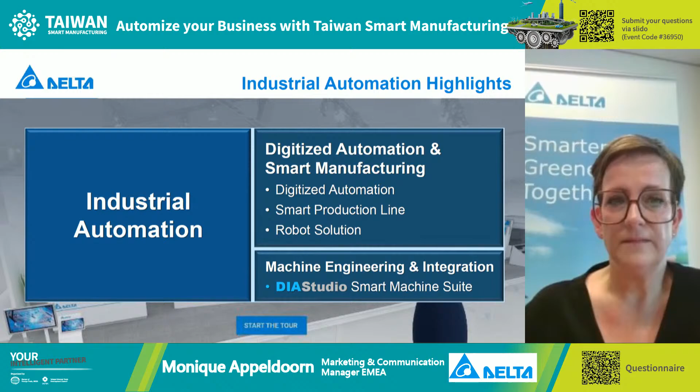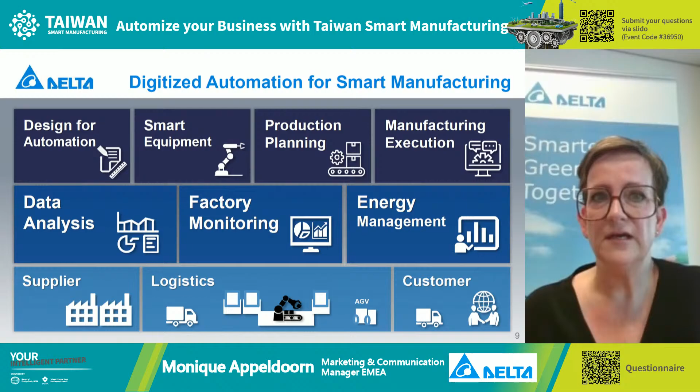In digitized automation, Delta is proud to offer a complete management software package that allows you to manage your factory floors and to be a smart manufacturer in the ever-changing world today. As you can see here, we have design for automation, smart equipment, production planning, and manufacturing execution. So basically, from the factory floor all the way up to the management of the factory, we can help you manage this.

In Digitized for Smart Manufacturing, we offer smart production lines, offering industrial Internet of Things, automation systems, industrial robots, and smart equipment.

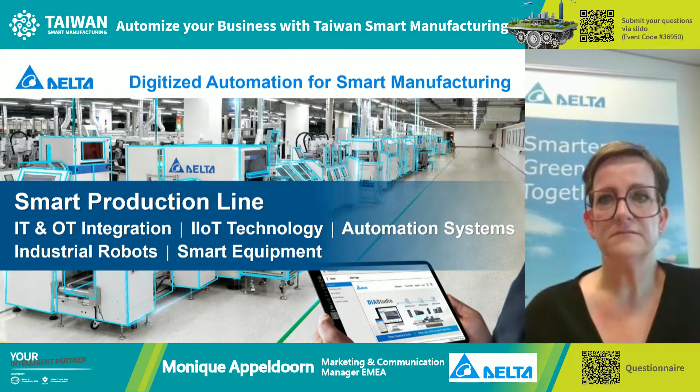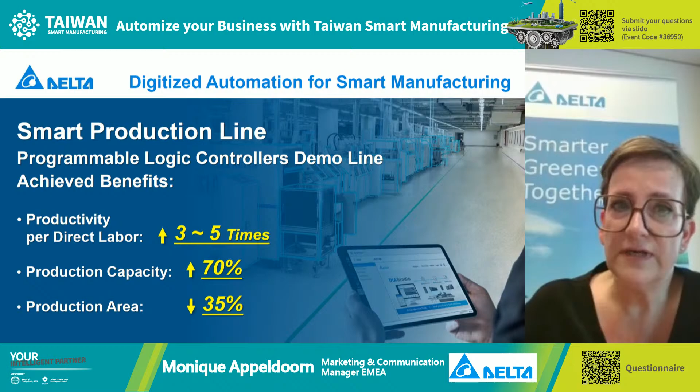In smart production line, we are looking at the smart production line in the Wujiang factory floor. This is one of our own factories in China, where we have implemented our software as well as our hardware to make a smart production line. By doing this, we've increased productivity per direct labor 3 to 5 times, increased production capacity up to 70%, and decreased the production area.

Of course, in smart manufacturing, you cannot think smart manufacturing without robotics today. What are the advantages of robotics? It's flexible production, quick implementation, consistent quality, and enhanced productivity.

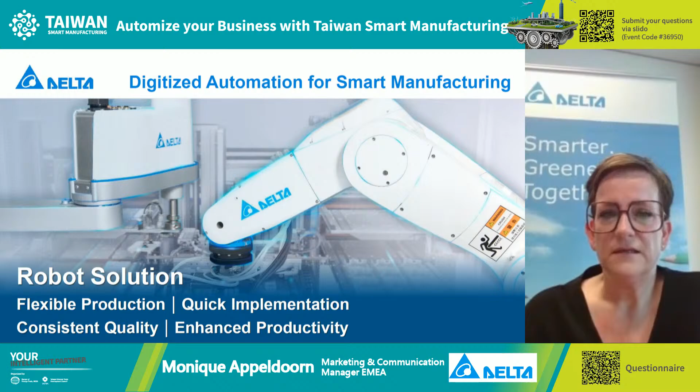And here we are at the Hannover Messe show. What we are focusing on today is the robotic coffee serving station. This is a coffee serving station that we've actually had made in Slovakia. You tell the robot what kind of coffee you would like. In fact, there's only one type of coffee - no cappuccino, no espresso. You tell the robot you would like a cup of coffee, and it will serve you this coffee as a visitor on our booth.

The last focus that we have at Hannover Messe this year will be the launch of the DIAStudio Smart Machine Suite. It consists of 3 packets of software: DIA Selector, DIA Designer, and DIA Screen. The big benefits of the Smart Machine Suite are reduced commissioning time and faster integration, and basically you can tell your hardware what you want it to do for your machine.

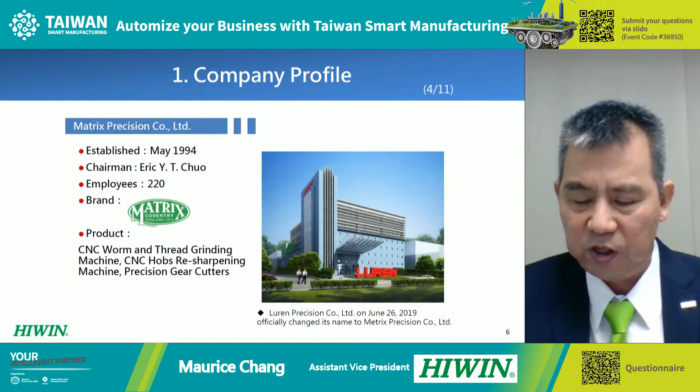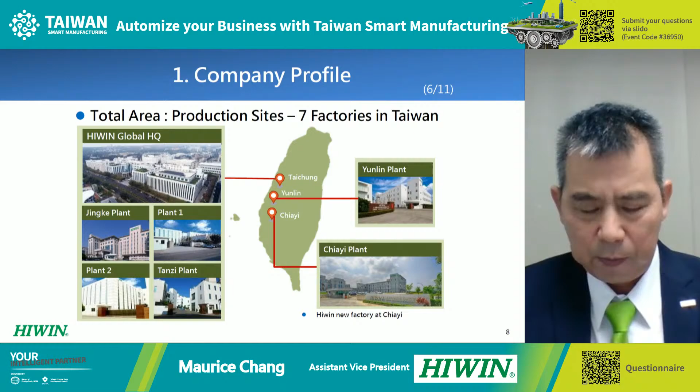All Hiwin's factories are located in Taiwan. We have 7 factories, with all key components being manufactured in Taiwan.

Hiwin also has a global network, having 12 subsidiaries and distribution channels in more than 50 countries globally.

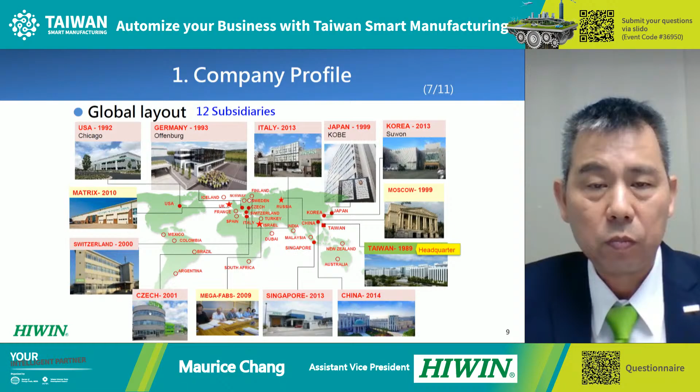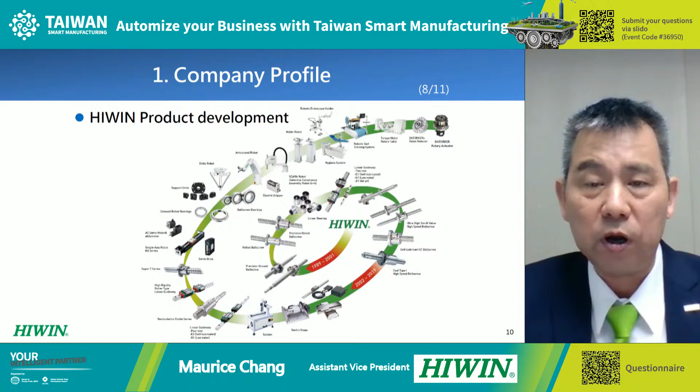Here you can see the full range of Hiwin's products, which includes ball screws, linear guideways, single-axis robots, bearings, cross-roller bearings, DATORKER reducer gears, torque motor rotary tables, multi-axis robots, end effectors, and medical robots.

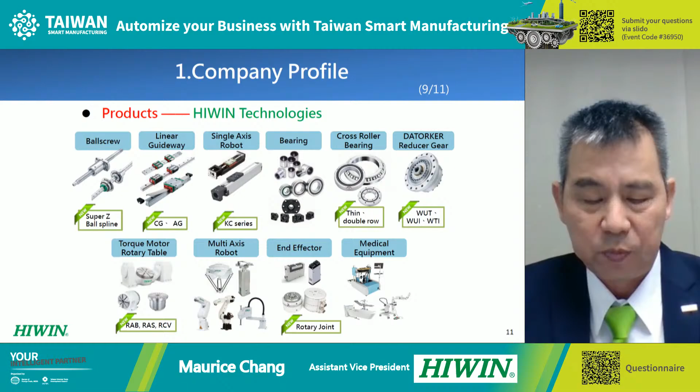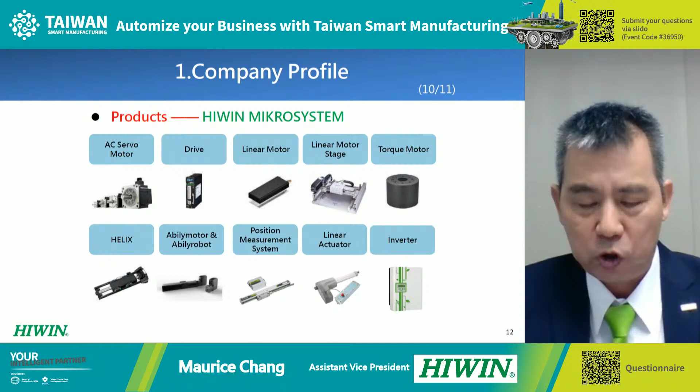Some of our best achievements include Hiwin currently being number 2 globally in both ball screw and linear guideway manufacturing. We are also one of only 2 manufacturers in Asia for torque motors, and the only company that combines motion control components with electrical components to complete a total solution for our customers. Hiwin is also the largest semiconductor coordinate robot supplier, and the top 3 semiconductor equipment manufacturers in the world are Hiwin's key customers.

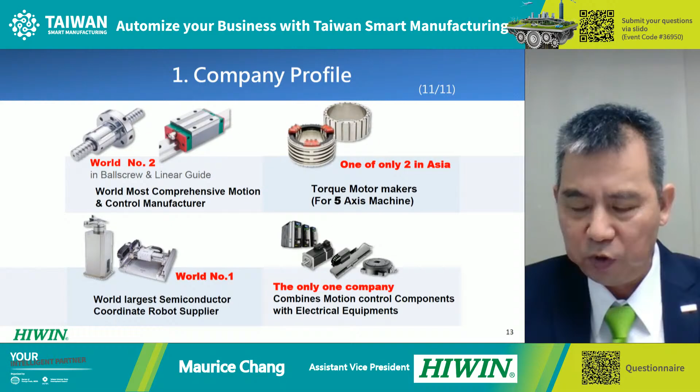Hiwin's outstanding performance has been recognized by the global media as we ranked number 16 in the Nikkei Business Asia300 Power Performance in 2019. Hiwin was also ranked in Forbes Asia's 200 Best Under Billion company listing last year.

Hiwin has a constant focus on smart manufacturing, and we have collaborated with universities in Taiwan and abroad to develop the next generation i4.0 ball screw. With a specially developed sensor and edge computing technology, the i4.0 ball screw can pre-diagnose the vibration, lubrication, temperature, and preload of the ball screw in precision machinery. It is also capable of sending feedback to operators and managers by computer or smartphone to prevent unexpected machine shutdown, thereby improving productivity and reliability.

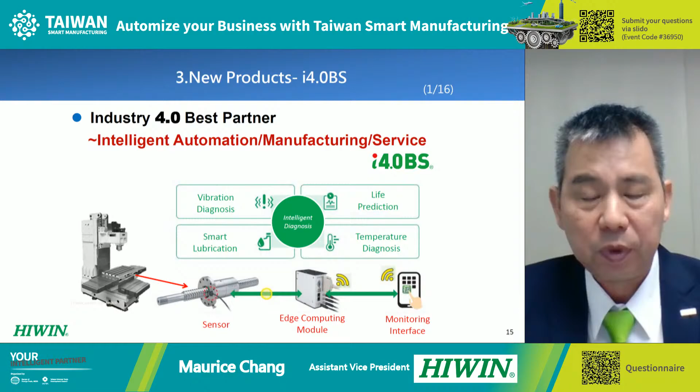Next, we will introduce some of Hiwin's total solution products, which are core strengths and value added to our customers. The KK total solution consists of our KK single-axis robot, coupling, servo motor, and drive. Customers receive total solutions for their automation. They just need to plug and play instead of looking for different suppliers for different parts and having the hassle of installing them themselves.

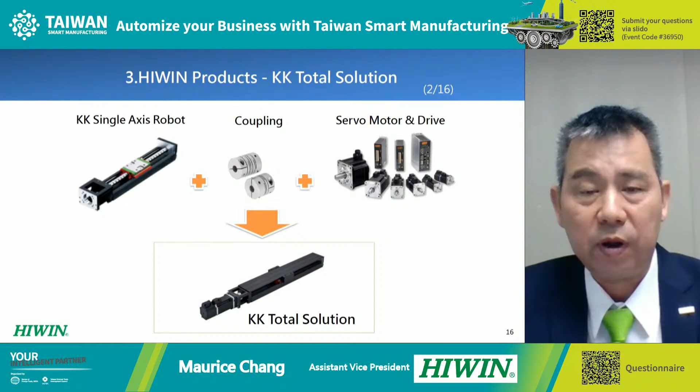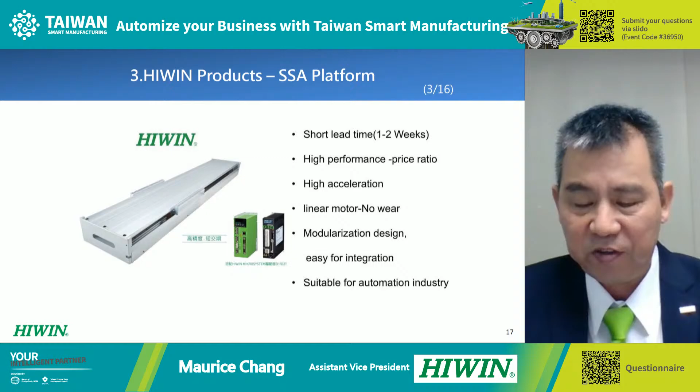This page shows the SSA platform, which is a total solution stage using our linear motor technology. It offers high speed and high accuracy. As you can see here, this is LED inspection using Hiwin's KK total solution.

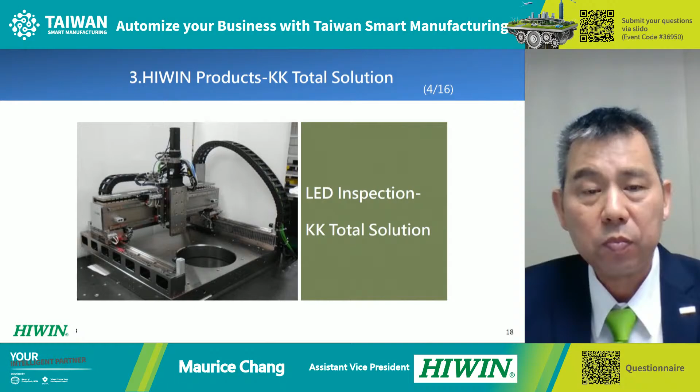This is the torque motor rotary table, which is one of Hiwin's main products. Being one of only 2 manufacturers of torque motors in Asia, we have the advantage of having in-house key components technology and know-how. Therefore, we have the competence to offer top quality, value-added products to high-end customers. Hiwin designs and manufactures all the key components such as torque motors, cross-roller bearings, rotary table bearings, and drives for our torque motor rotary tables.

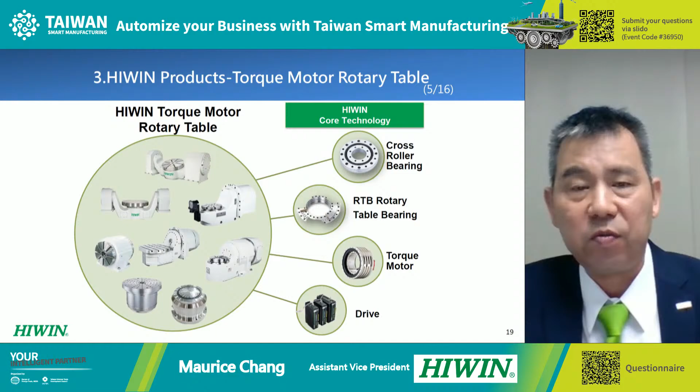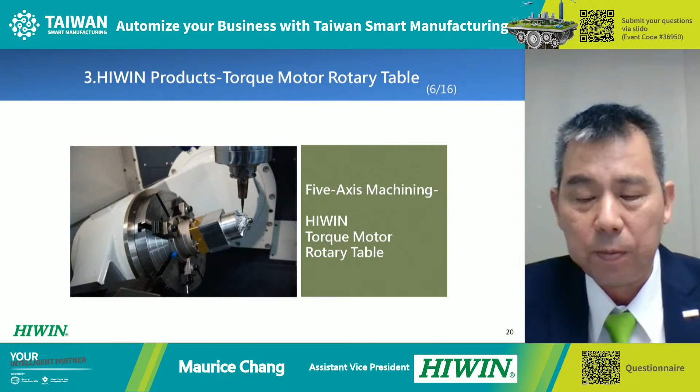This is an example of a precision 5-axis machine using Hiwin's torque motor rotary table to produce turbines for automotive parts. The torque motor rotary table also helps customers increase the machine's value-added function to upgrade from a 3-axis machine to 4 or 5-axis machines. This enables the production of more complicated and more precise components by a single machine.

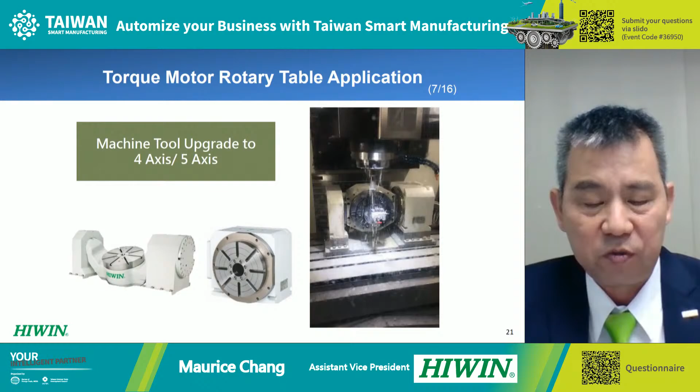Moving on to our robots, Hiwin has a wide range of robots, from the articulated robot to SCARA robot for industry applications, to the delta robot mainly used in the food and pharmaceutical industries, to wafer robots which are used in semiconductor industries. All the major components of robots are manufactured solely by Hiwin.

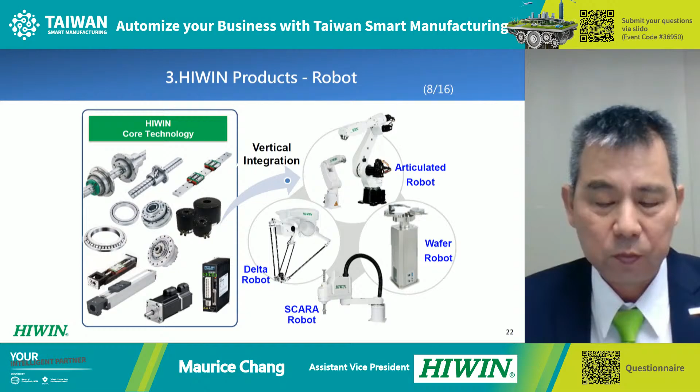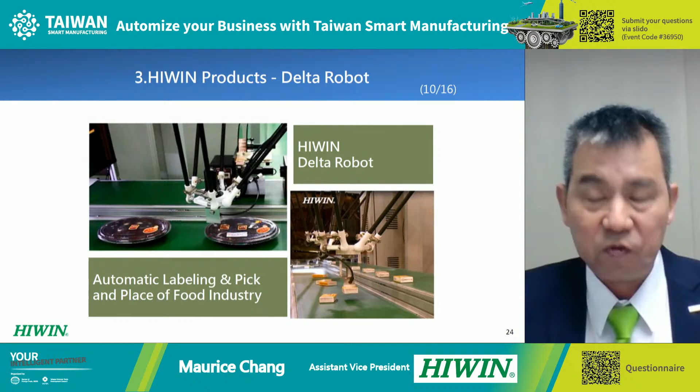The latest total solution product from Hiwin is the DRA Datorker rotary actuator. The Datorker is a high precision and compact gear reducer with a strong gear reduction ratio used in robots, high precision machinery, and indexing applications. Along with the servo motor and our D2T drive, we can offer customers an integrated precision product, which customers, again, just need to plug and play.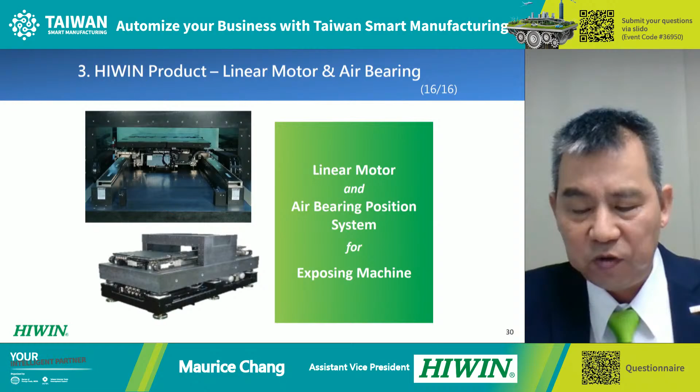This concludes Hiwin's presentation today, and we'd like to thank everyone who is attending this online press conference. If anyone has any questions, please feel free to ask later on.

Thank you. Thank you very much, Maurice. And as you have heard from Delta and also from Hiwin, they have many product lines. Today we know that we have to keep everything under 10 minutes, so everything sounds a little bit rushed. For this reason, we have a questionnaire at the bottom of the screen.

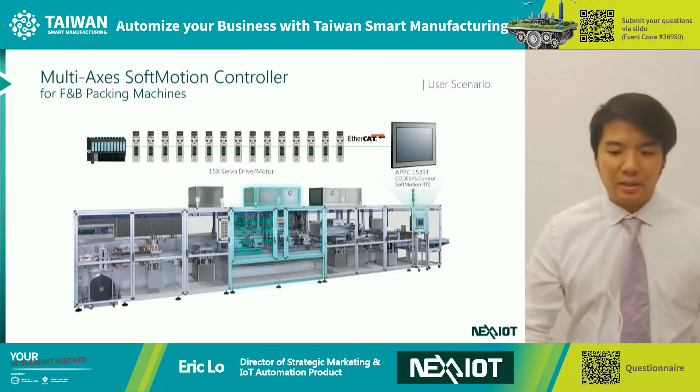The system architecture is quite simple. As you can see in this slide, you can have one panel PC installed with software called Codesys Soft Motion. This makes the panel PC a soft motion controller with HMI functionality to replace the traditional PLC and HMI. And with EtherCAT technology, you can easily use a LAN cable to connect 15 axis of servo drive and motor, and remote I/O with sensors included, so the system architecture becomes even more simplified.

So our offering of the soft motion controller includes one controller, panel PC or box IPC, installed with Codesys soft motion software inside as a soft motion controller. We also offer distributed I/O, so it's a very comprehensive soft motion function for the customer. It supports up to 255 motion axis, and of course distributed clock enabled for real-time control. The most important thing is that the soft motion controller follows the PLC open standards, the motion control part 1, part 2, and part 4.

The next feature is that it's a high performance controller. The fast cycle time is within 50 microseconds. The maximum task you can run is 100 tasks per cycle. It also supports Profinet, Ethernet IP, EtherCAT, and Modbus TCP protocols, so you can easily connect to Siemens servo drive and motor, Rockwell Automation's servo drive and motor, and even Beckhoff and Schneider's automation products. Also the OPC UA server is available to connect to the SCADA system so the machine can be easily monitored in the remote center.

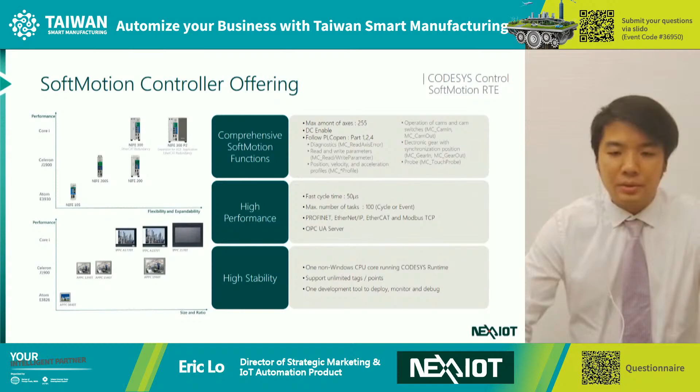I will go through two successful stories. The first is metal sheet manufacturing. In the past, they used two PLCs and one small 7-inch HMI solution to construct their metal sheet machine. After we offered the 15-inch panel PC installed with Codesys and EtherCAT included, they achieved production speed up to 70 meters per minute, which means they enhanced production speed by 40%. They also simplified the system architecture from 2 PLCs and HMI to an all-in-one panel PC controller.

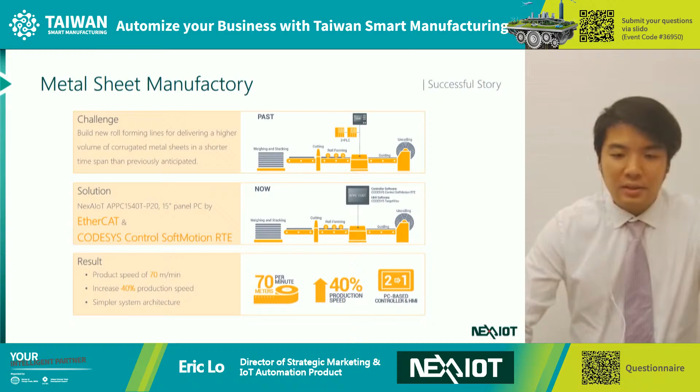The other successful story, as mentioned earlier, is a packing machine. In the past, the customer used CANopen to do the 15-axis soft motion control inside the food and beverage packing machine. But the control algorithm required programming 15 times, because each servo drive and motor needed its own programming. The synchronization was also quite complicated.

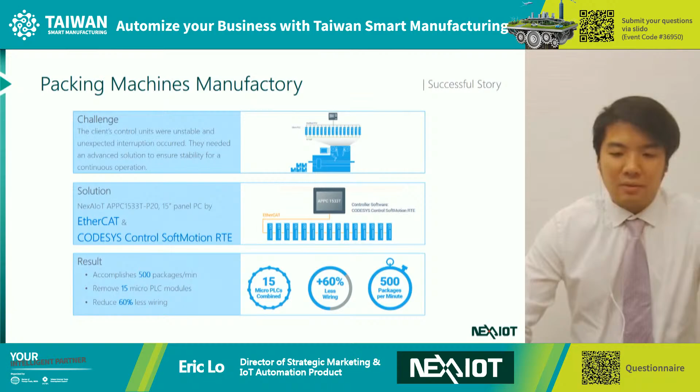But we offer PC-based automation solutions with a panel PC installed with CODESYS and EtherCAT. Now they just do one programming and simplify the system architecture with one LAN cable. As a result, they complete 500 packages per minute and remove the 15 micro PLC modules and their programming. For the customer, this reduces 60% of wiring. So the total cost of ownership of the machine is cut down significantly, and productivity is increased for the customers.

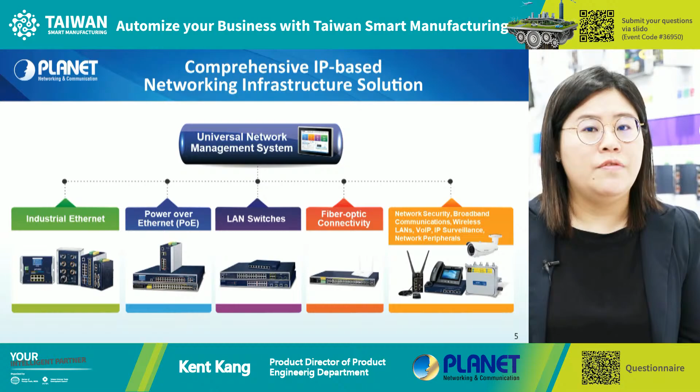As you can see, all the network infrastructure devices are deployed everywhere in various markets, such as industrial applications like smart factory and IoV, as well as smart cities, telecoms, enterprises, and data centers.

Hi, I'm Kent, the Product Director of Planet Technology. Now I'm going to show you how Planet's innovative solutions can help automize your industrial network. To start, Planet Industrial Ethernet Solutions consists of a complete product portfolio at the information, control, and device levels. It's highly reliable and secured. Products we design are compatible with many industrial protocols, such as Modbus TCP, EtherCAT, and MQTT, to ensure interoperability among all industrial devices, such as HMI and SCADA systems.

Our devices help build connections via multiple media. High performance and security functions are also ensured, such as up to 10 gigabit connectivity, cybersecurity, flat-type design, and long-reach transmission, and more. Planet provides multiple form factors to fit different environments and installation preferences. It's compact in size, fitting nicely in any environment, and the high-density features are perfect for various networks. The flat-type design can be installed in an in-wall cabinet. The outdoor weatherproof and vibration-proof products are suitable for rail applications, with wide operating temperature from -40 to 75 degrees Celsius, providing customers with stable data and power transmission.

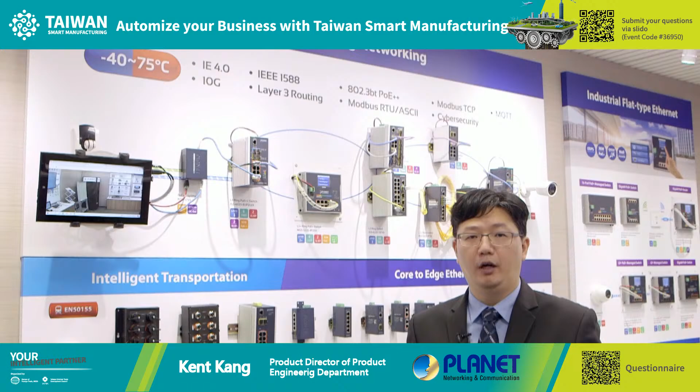Next, you must have heard of Planet's famous Power over Ethernet solutions. With one UTP cable, our product can deliver up to 95 watt 802.3bt PoE++ for data and power transmission.

This power can be delivered to devices like IPC, POS systems, healthcare, digital signage, and smart lighting. Except for standard UTP cable, we allow customers to reuse their existing phone wire and coaxial cable to transmit data

and power, and further extend the distance, saving customers time and money. We provide a wide range of PoE products to suit different demands for all industrial environments.

Also, with our unique intelligent PoE management functions, devices can be monitored, analyzed, and managed.

Speaking of device management efficiency, Planet has specially developed the Universal Network Management System. All your wired and wireless networking devices can be centrally managed.

As you can see here, with our unique Touch LCD designed Universal Network Management Controllers, network devices can automatically be discovered with the topology shown on the screen.

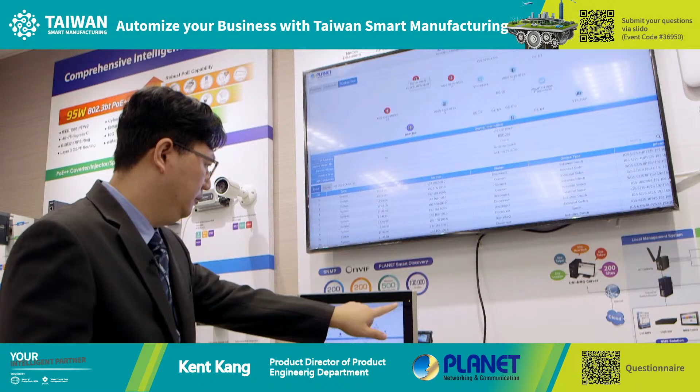It also features an easy-to-use dashboard, event report, and alarm to ensure the efficiency of your industrial network.

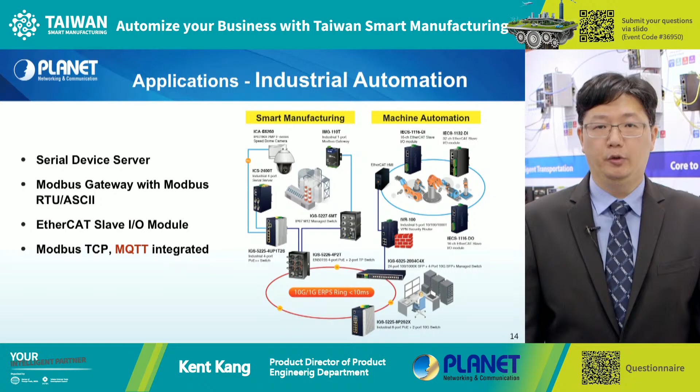Apart from Ethernet data transmission and deployment, we also help customers connect their existing equipment to Ethernet networking. Here is a Planet industrial automation application, which includes smart manufacturing and machine automation.

Our industrial automation product line includes serial over Ethernet, Modbus TCP switch, and Modbus gateway, EtherCAT I/O modules, and serial over 4G LTE gateway, all designed to help realize IIoT-based connectivity.

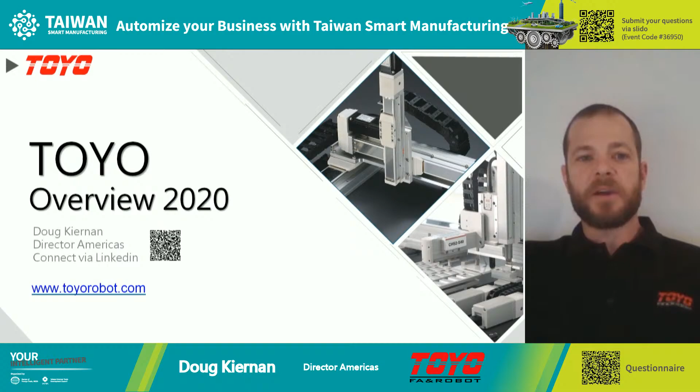Toyo is the largest single-axis aluminum extrusion electric actuator manufacturer in Taiwan and mainland China. I know that's a mouthful with a lot of adjectives, but think actuators with electric motors, not

pneumatics, and also not steel body actuators that most linear bearing manufacturers make. Toyo was founded in the year 2000 in Taiwan.

Our factory is down south in Tainan, and our sales and technology center is up north in Hsinchu near Taipei. It's less than a 2-hour ride between them on the high-speed rail.

In June 2019, we opened our newest factory, which is about 20,000 square meters. That is our main manufacturing and assembly area. We also have a 6,600 square meter CNC shop next door.

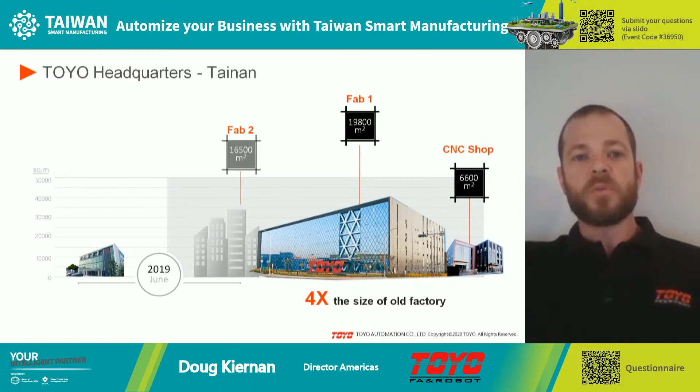This new factory is 4 times the size of our previous factory. We also have land and plans to expand as needed.

This year, we are focusing on growing the Americas. I am very proud to be the first American employee joining Toyo late last year.

However, I've been working with Toyo for almost 6 years, first as a manufacturer's rep and then as a sales manager for Toyo's first American distributor. I'm really excited to grow the business in the Americas, and Europe is not going to be far behind.

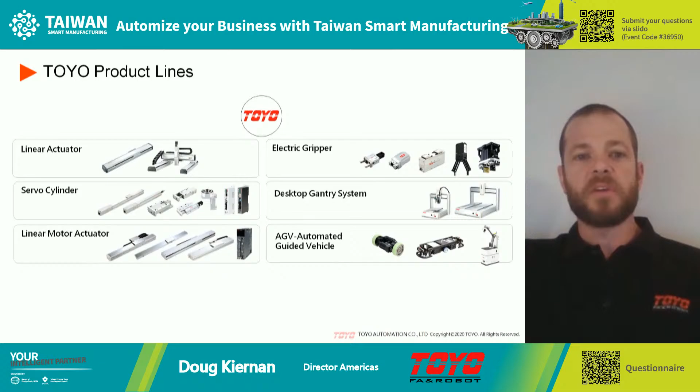Here are the 6 Toyo product lines. Linear actuators, which are ball screw or belt-driven actuators without the motor supply. Servo cylinders, which are actuators with a single-axis controller and the motor. Linear motor actuators, with both iron core and coreless models. Electric grippers, which fall under the servo cylinder, utilizing the same single-axis controller. Desktop robots, turnkey XYZ with our multi-axis controller and software. Automated guided vehicles - we are the largest AGV manufacturer in Taiwan, with over 800 AGVs deployed in the field.

Here is our GT actuator series. This is a very important product line for Toyo because it's the first product that uses our integrated linear bearing technology. Look at the image in the lower left corner - we take an aluminum extrusion that is machined and precision milled, then we bond the steel bearing raceways into the extrusion, and then we do a single pass grind on this body assembly.

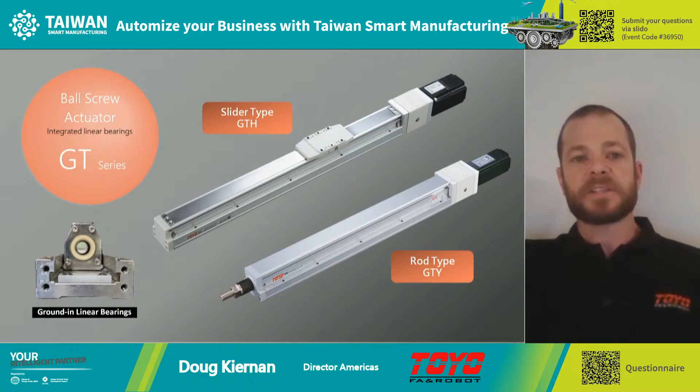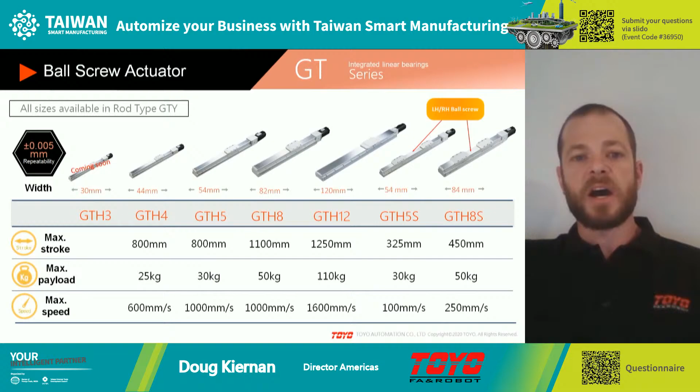Here are the 5 different GT frame sizes that we currently have: GT3 at 30 millimeters wide, up to the GT12 at 120 millimeters wide. We also have left-hand, right-hand ball screw configurations for the GTH5 and GTH8, which can be used for alignment or a large gripper application. All sizes also have the GTY rod style actuator.

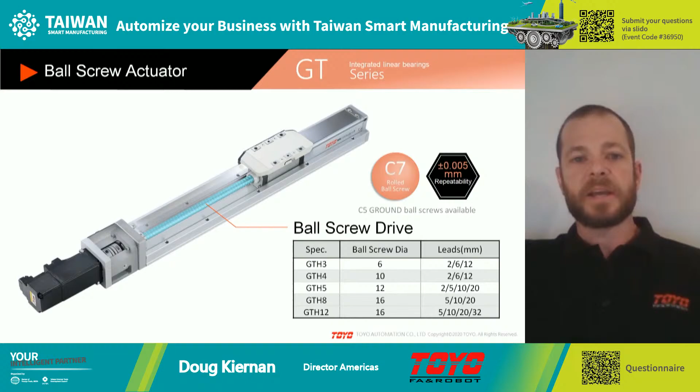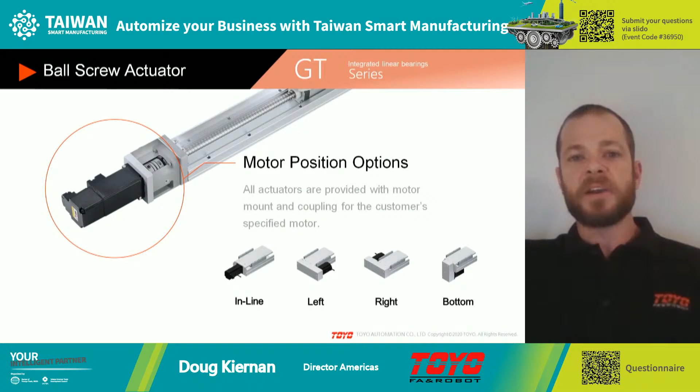All of our actuators are supplied with a motor mounting block and a coupling for our customer's selected motor. We also offer side or parallel mount motor configurations.

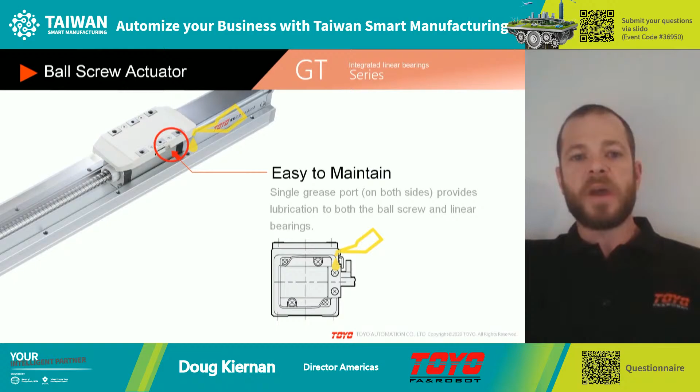This is a really nice feature providing a single grease port that will lubricate both the ball screw and the linear bearings. With our magnetically sealed actuators, we can add a pneumatic port, and if you pull a little bit of vacuum, it becomes Class 10 clean room rated. Conversely, if you put a little bit of positive pressure in that pneumatic port, it's going to do a really good job helping to keep dirt and debris out of the actuator.

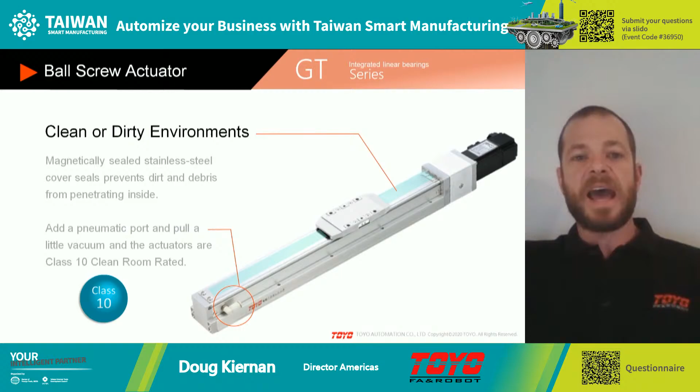The GT series has a lot of nice mounting features, starting with the option to mount from the top using through holes or from the bottom using tapped holes, both without having to remove any covers. All actuators also come standard with 3-pin locating holes and a reference edge.

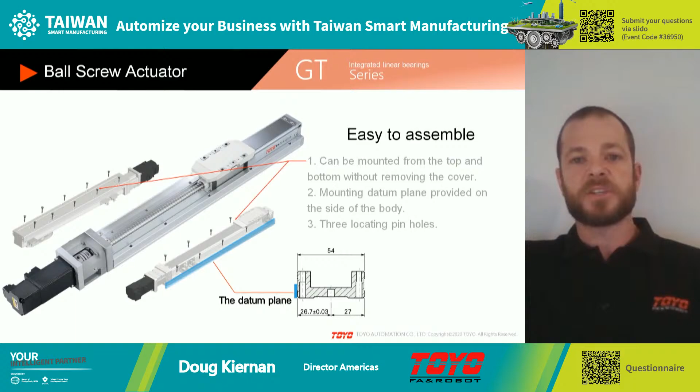Our single pass grinding manufacturing process provides precision straightness and flatness of plus or minus 20 microns per meter. This is on par or better than steel body actuators of some of our competitors.

This is a comparison showing our old ETH6 actuator that used a mini size 15 wide bearing compared to the GTH5 actuator. We achieved similar bearing capacity and used the same ball screw in a much smaller package. Toyo is now using this technology across other product platforms, including grippers, linear motor actuators, and mini slide stages, all of them reducing size, weight, and cost.

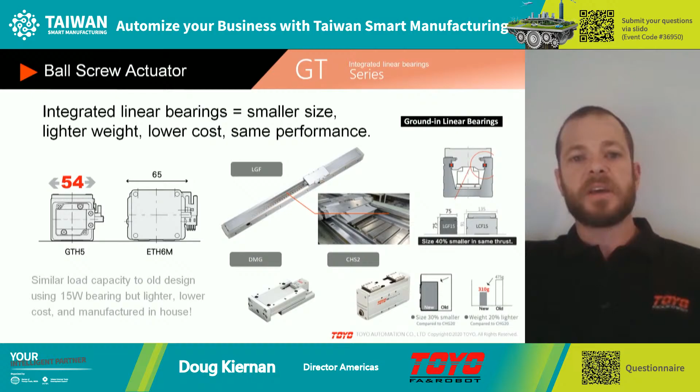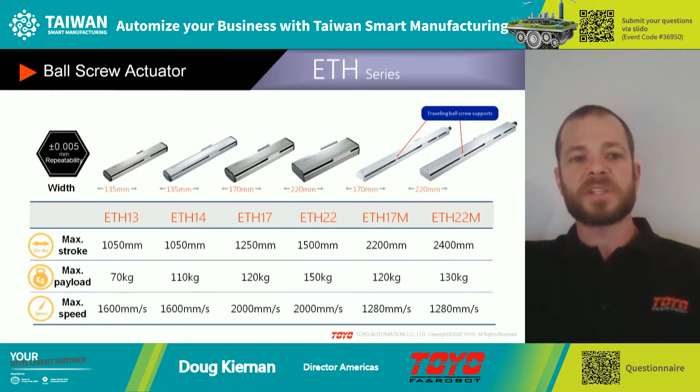Once we grow out of the GT series, we get into our ETH series, which is a common actuator configuration using 2 linear bearing rails with a ball screw down the middle. You can see our product range here, starting with size 15 bearings up to size 25 with similar size ball screws. For extra long strokes, we have traveling ball screw supports in the size 17 and 22.

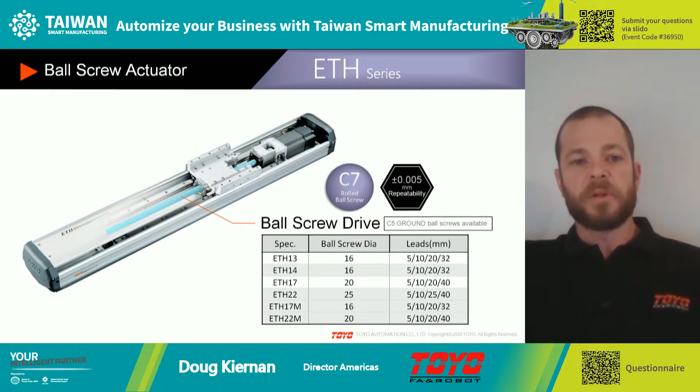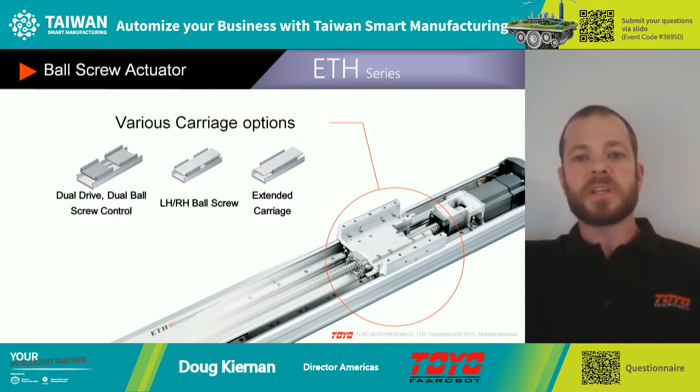Again, different motor mounts, this time adding the motor undercover option. With different drive configurations, we offer dual ball screws, left-hand, right-hand ball screws, and extended carriages.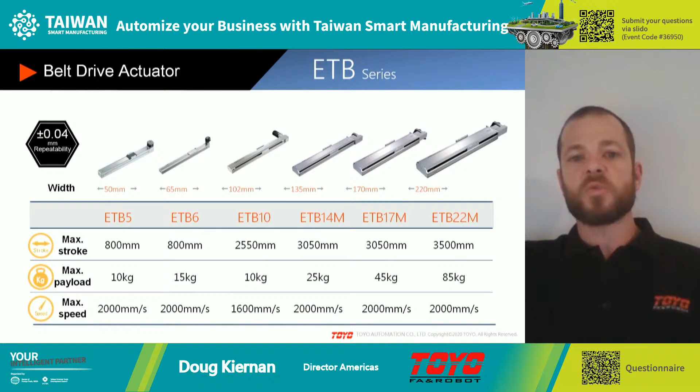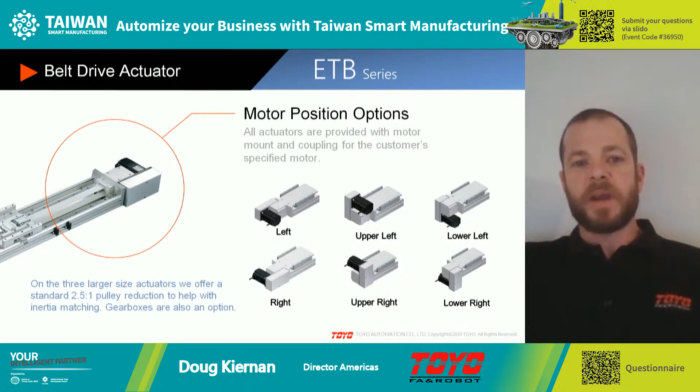We offer 2 belt types depending on your application. Different motor positions are available. On the 3 larger size actuators, we offer standard 2.5 to 1 pulley reductions to help with inertia matching. Gearboxes are also a standard option.

Here are some different configurations we can offer: alignment, dual carriages, and extended carriages.

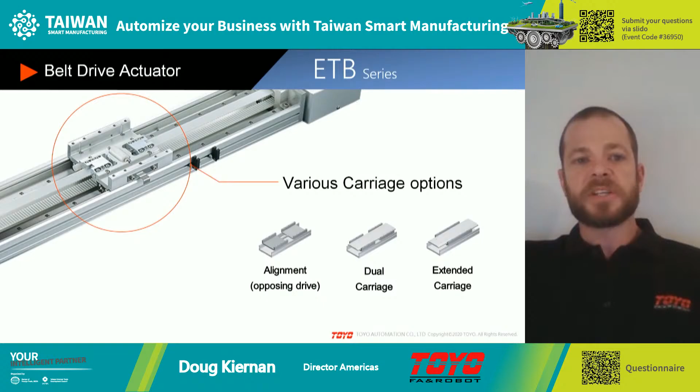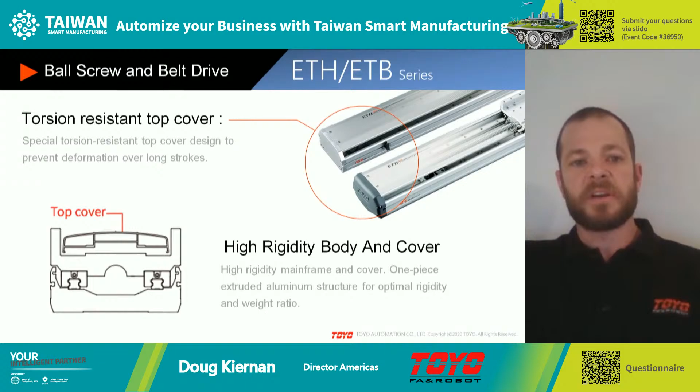The next few slides are some features offered for both our ETH ball screw and our ETB belt drive actuators. Here's our lightweight extruded torsion resistant cover. Here are our magnetically sealed cover options, Class 10 clean room rated, good for contaminated environments. They also look great with the motor undercover.

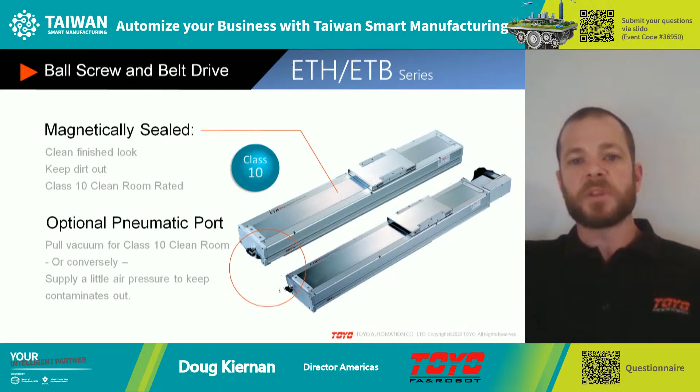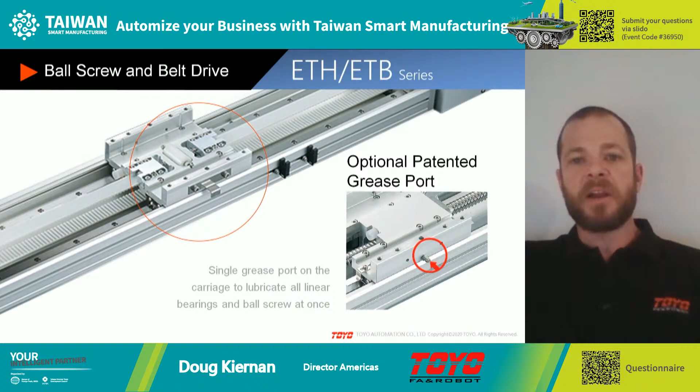We supply easy to mount sensor options in multiple locations. Again, this very valuable single grease port option hits all of your bearings and ball screws without having to remove the cover.

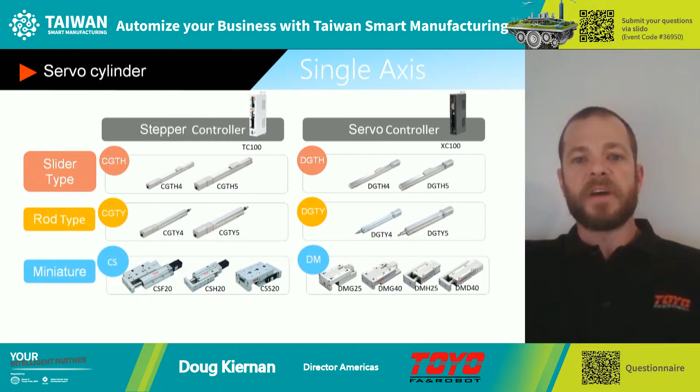Servo cylinder. This is our single axis controller, available on all the actuators shown here and more.

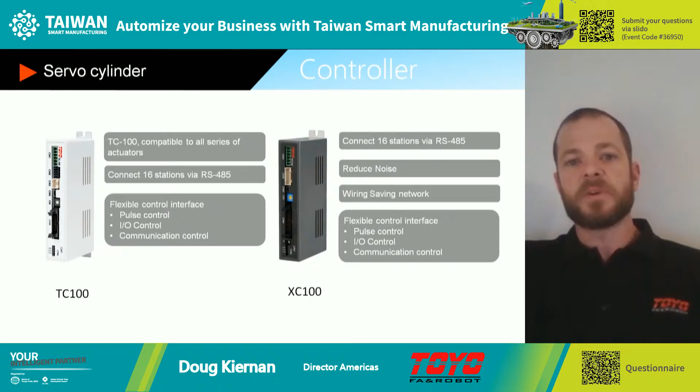TC and XC100 have a lot of nice features for a single axis controller. We provide three modes of operation: pulse, I/O, and communication.

Grippers. We have a few different styles providing a wide spec. These use the same TC100 controller.

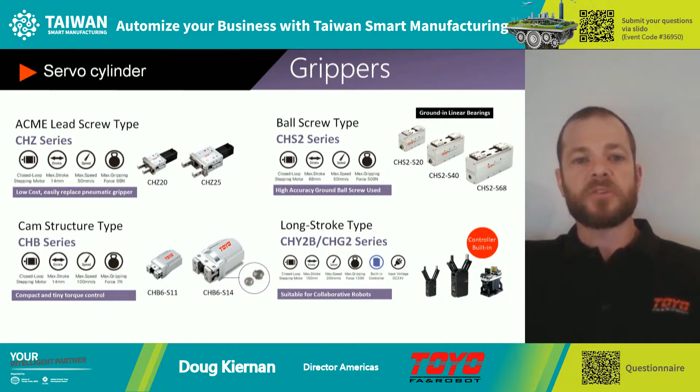Linear motor actuators. We have invested a lot of R&D and production capacity into linear motors in the past few years. We now manufacture these in-house. We focus on the iron core as it is the best option for most applications. You can see our LG series, which has the integrated linear bearings, covered, sealed, and open options.

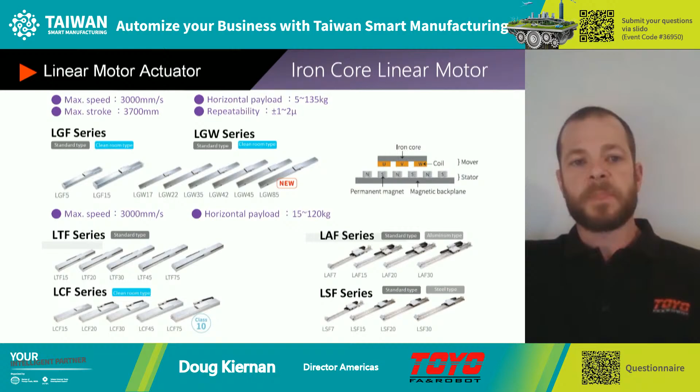For those applications that require it, we also have coreless linear motor actuators.

The JTB is a desktop robot ready to go for your Cartesian robot applications. Ball screw or belt driven with integrated software and controller. Perfect for dispensing, screw insertion, soldering, vision inspection, and many other applications.

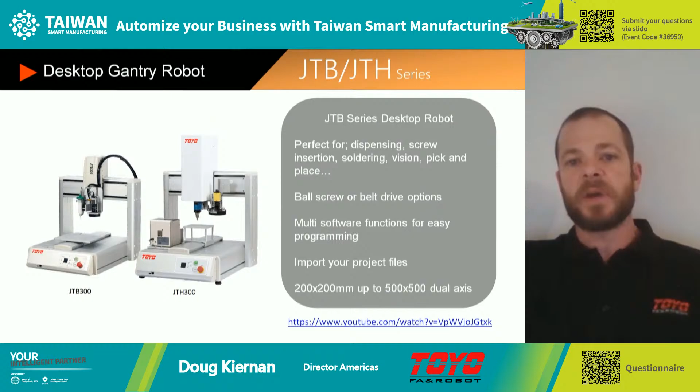Click this link to see an awesome 38-axis assembly machine using 100% Toyo actuators to get an idea of our capabilities.

Thank you for your time, and we look forward to working with you on your next automation project.